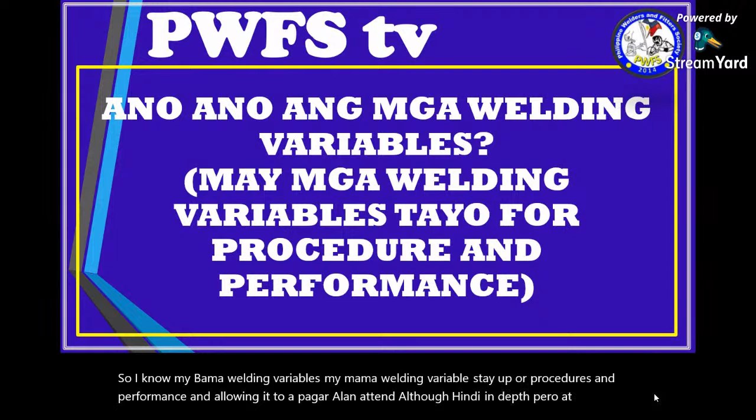So ano nga ba ang mga welding variables? May mga welding variables tayo for procedures and performance. Itong dalawang ito ay pag-aaralan natin. Although hindi in-depth, pero at least makikita nyo ano yung mga welding variables na ginagamit natin sa WPS natin, or sa ating welding procedure specification, at ganun din sa ating welder performance qualification test o WPQT. Right, so WPS welding variables...

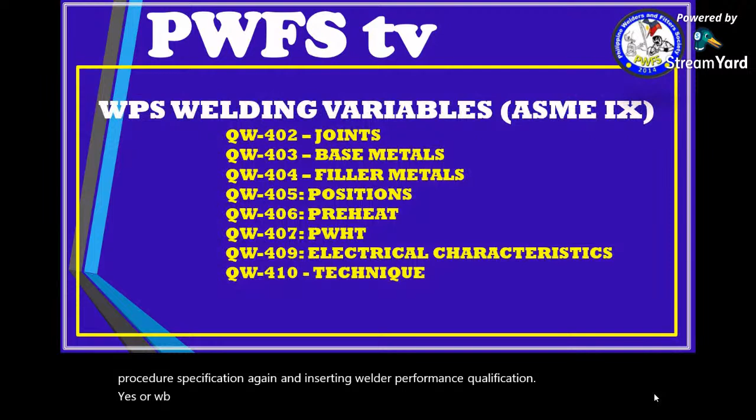WPS welding variables can be seen in ASME 9 as per QW 402, 403, 404, 405, 406, 407, 409, and 410. So these are the QW or the section of ASME 9, okay, where you can find the joints, base metals, filler metals, positions, preheat, PWHT, electrical characteristic, technique. So these are the specific WPS welding variables in accordance to ASME 9.

While the WPQT welding variables naman as per ASME 9 can be seen in QW402, which is the joints, QW403, which is the base metals, QW404, filler metals, and QW405, positions.

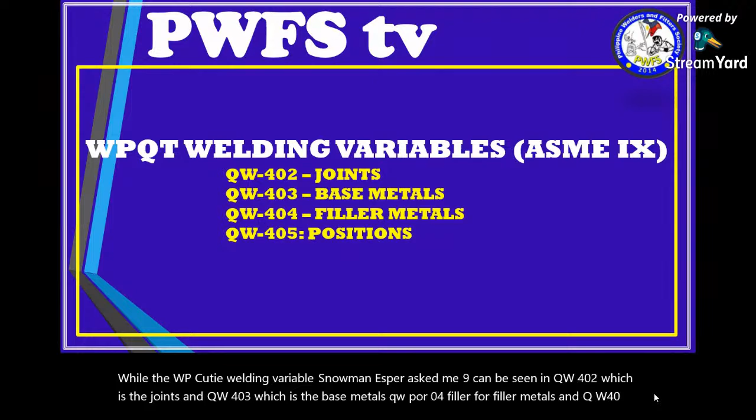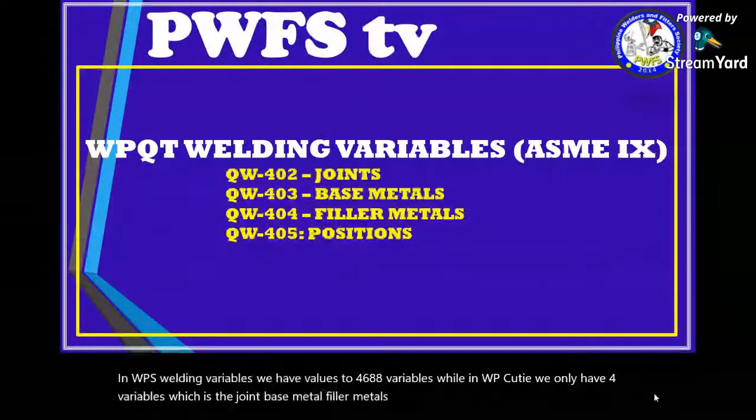So as you can see, in WPS welding variables, we have various variables, while in WPQT, we only have 4 variables, which is the joint, base metal, filler metals, and position. The rest are not variables in WPQT.

On the WPS, as per ASME 9, QW251.1, these are subdivided into three variables. Okay, so first one is the essential variable, the second one is the supplementary essential variables, and third one is the non-essential variables.

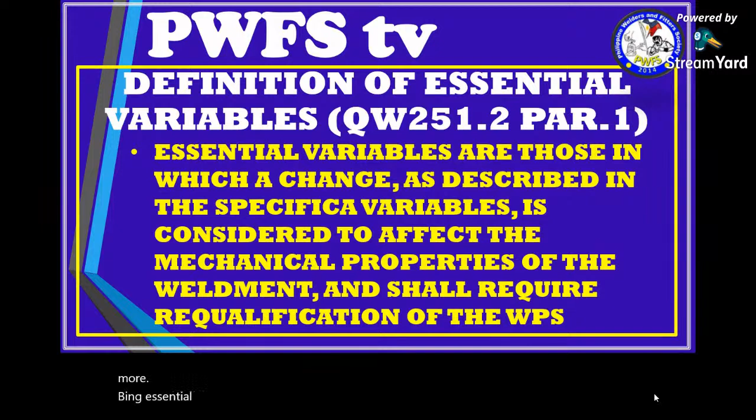Yung supplementary essential variable naman, as per QW251.2, paragraph 2, supplementary essential variables are required for metals for which other sections specify toughness tests and are in addition to the essential variables for each welding process.

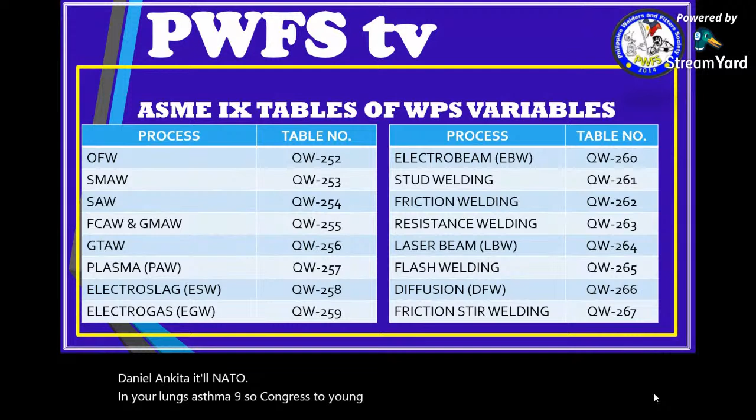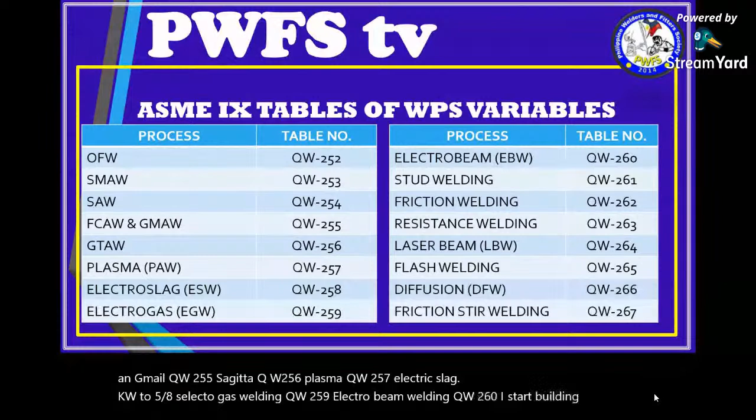Dito nyo sila makikita. So sa OFW, QW252, sa SMAW, QW253, sa submerged arc welding, QW254, sa FCAW and GMAW, QW255, sa GTAW, QW256, sa plasma, QW257, sa electroslag, QW258, sa electrogas welding, QW259, electron beam welding, QW260, stud welding, QW261, friction welding sa QW262, resistance welding, QW263, laser beam, QW264, flash welding, QW265, diffusion welding, QW266, and friction stir welding, QW267.

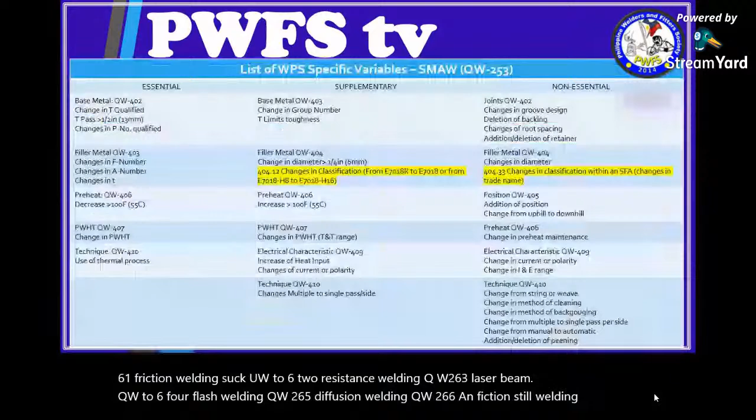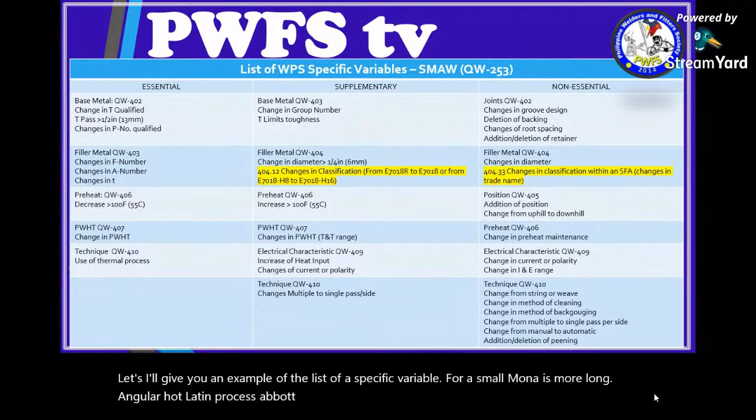Now, I'll give you an example of the list of specific variables for SMAW muna. SMAW lang, okay? Kasi kung tatalakayin ko lahat ng process, abutin tayo ng siyam-siyam. I'll just give you one example on SMAW or shielded metal arc welding. Okay? As per QW253, ang mga essential variables ng SMAW ay base metal, filler metal, preheat, PWHT, at saka technique.

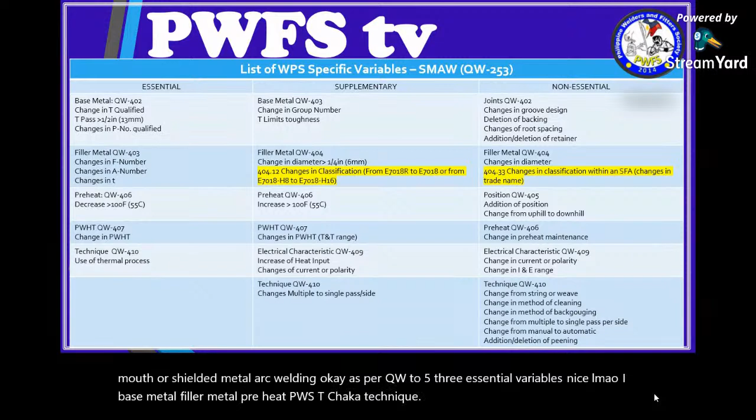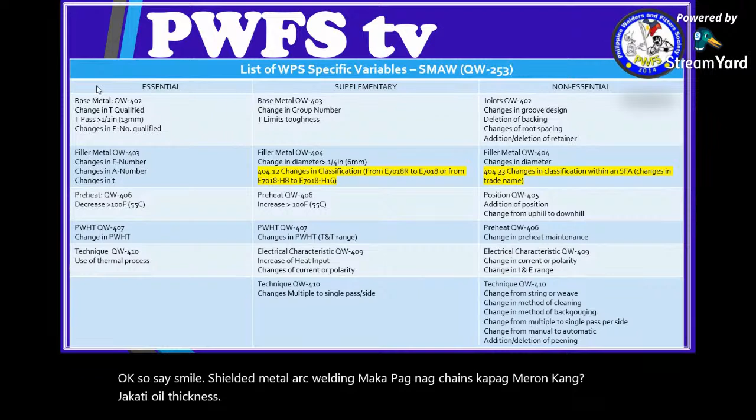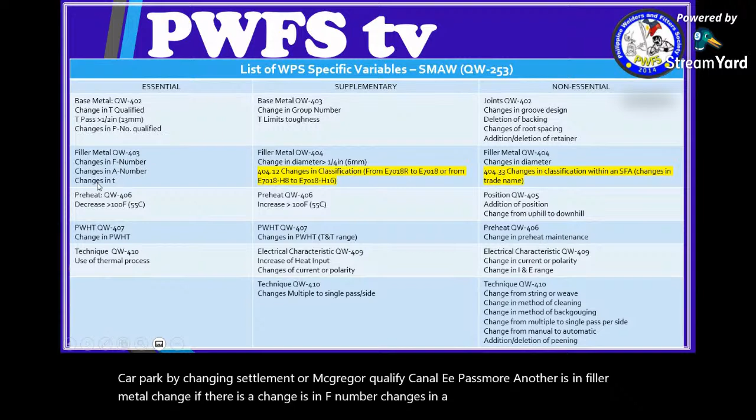Okay? So sa SMAW, sa shielded metal arc welding mo, kapag meron kang change in T qualified, tsaka T o yung thickness na greater than 13 mm, changes in P number qualified. Kapag may changes itong mga ito, magre-requalify ka ng WPS mo. Another is in filler metal. If there is a change in F number, change in A number, and change in thickness, your WPS must be requalified.

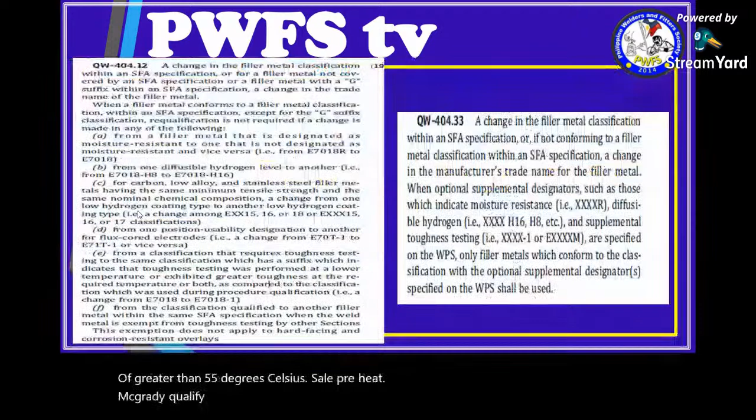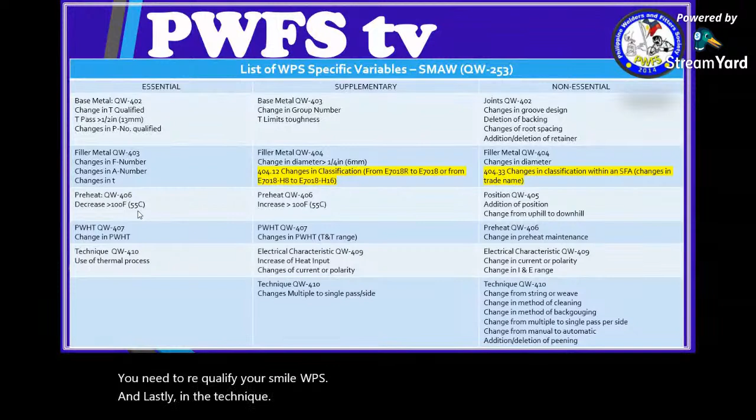Ganon din sa preheat. Kapag meron kang decrease of greater than 55 degrees Celsius sa preheat, okay, magre-requalify ka rin ng WPS mo. Ganon din sa PWHT. If there is a change in the PWHT, you need to requalify your SMAW WPS. And lastly, in the technique, on the use of thermal process, okay, magre-requalify ka rin ng SMAW WPS mo.

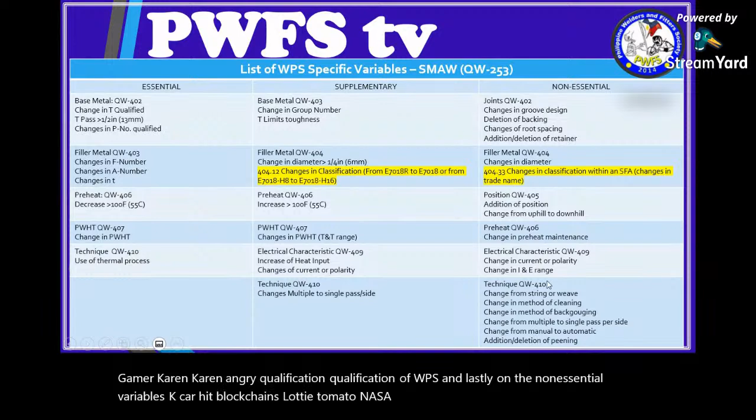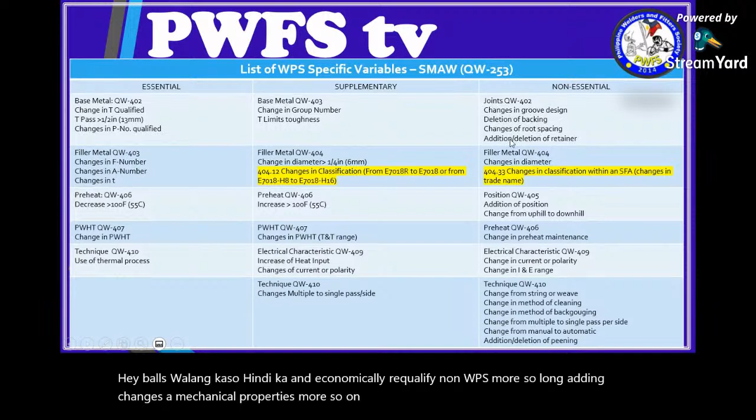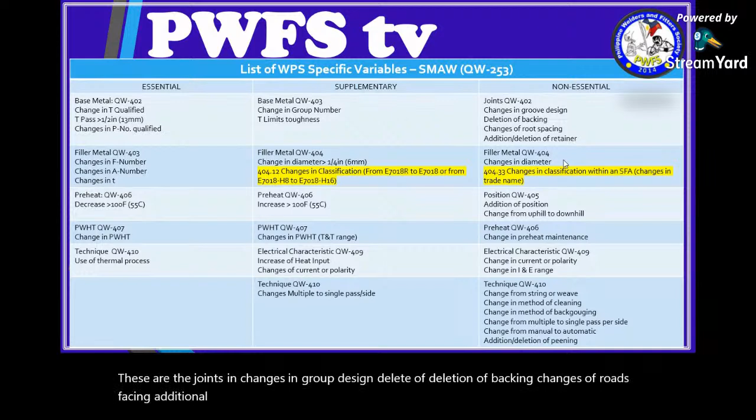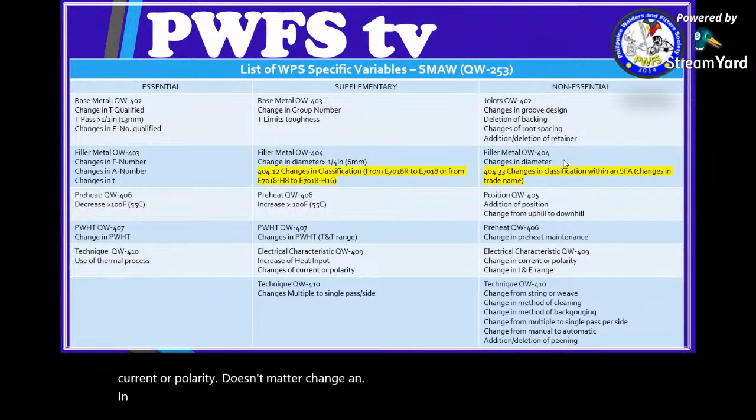These are the joints: changes in groove design, deletion of backing, changes of root spacing, addition or deletion of retainer. Okay? Sa filler metal naman, changes in diameter, changes in classification, it doesn't matter. Sa position, addition of position, change from uphill to downhill, it doesn't matter. Change in preheat maintenance, it doesn't matter. Change in current or polarity, it doesn't matter. Change in, tawag dito, range, okay?

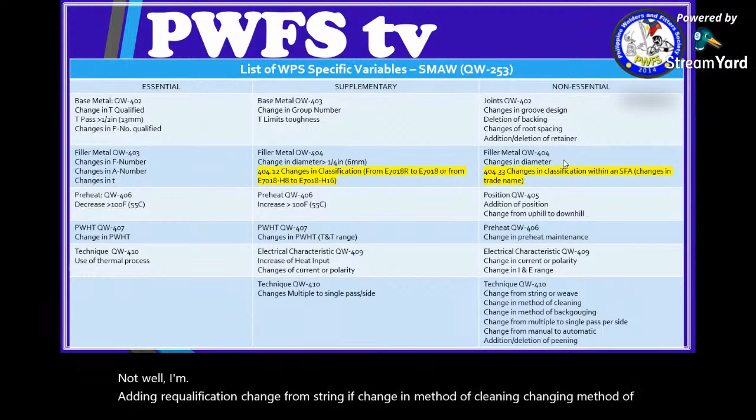Walang mangyayaring requalification: change from string to weave, change in method of cleaning, change in method of backgouging, change from multiple to single pass per side, change from manual to automatic, addition or deletion of peening, walang problema. Non-essential variables ito mga ito, so hindi ka na magre-requalify ng WPS mo as per ASME IX.

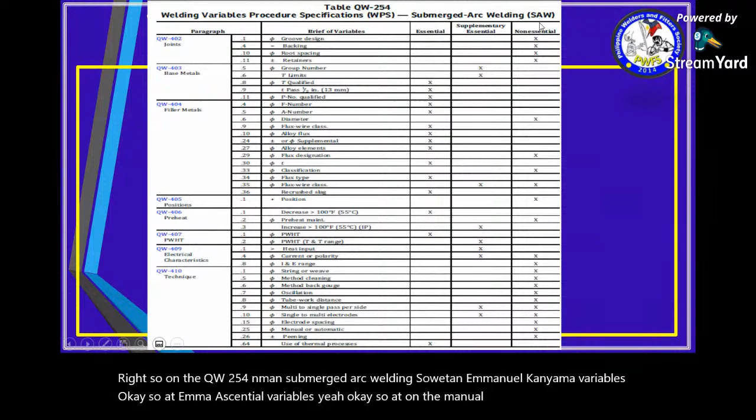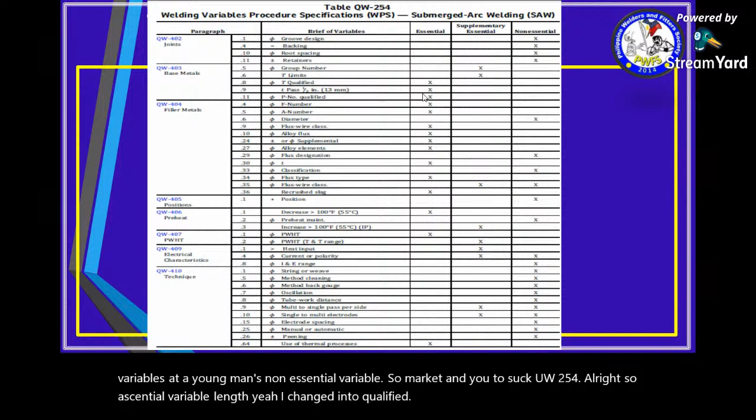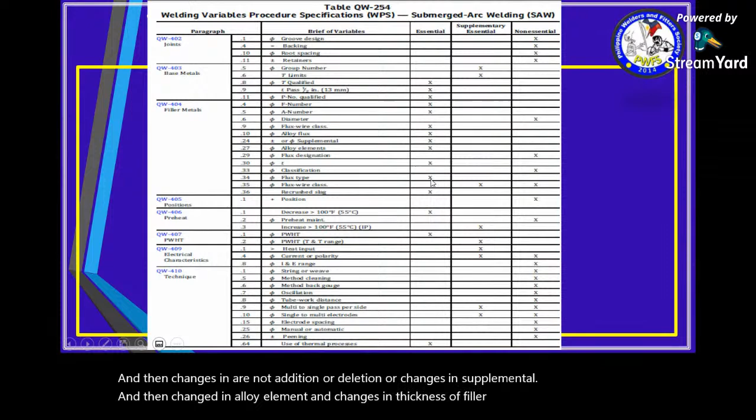Alright? So, ang mga essential variables lang niya ay change in T qualified, T pass greater than 13 millimeters, change in P number qualified, and then change in F number, change in A number, and then change in flux class, and then addition or deletion or change in supplemental, and then change in alloy element, okay, and change in thickness of filler metal, change in flux type, change in recrushed slag.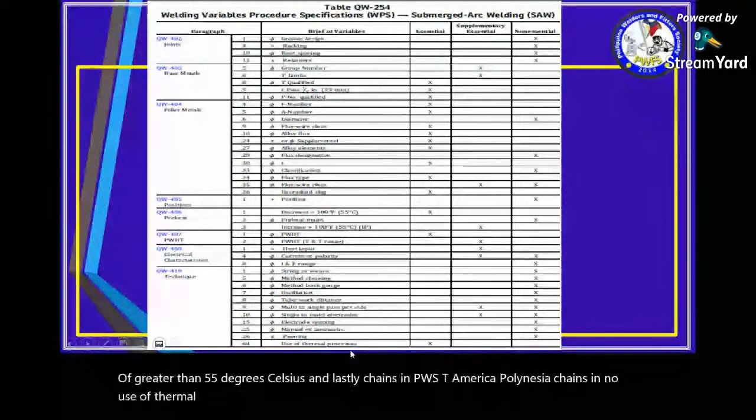And another two: in the preheat, decrease of greater than 55 degrees Celsius. And lastly, change in PWHT. Meron pa palang isa, change in use of thermal processes. So those are the essential variables. At ito naman yung mga non-essential variables. Alright?

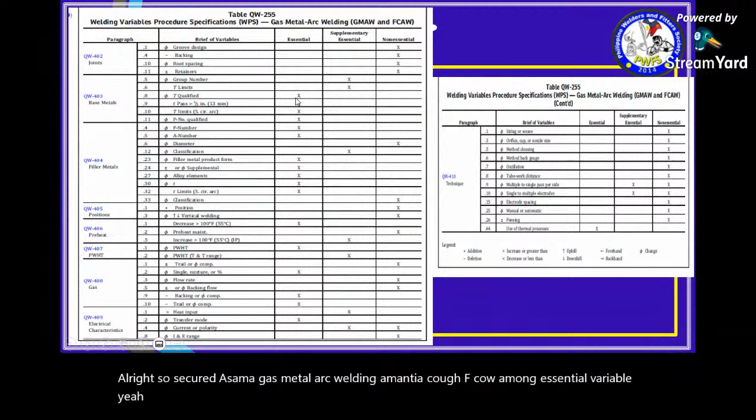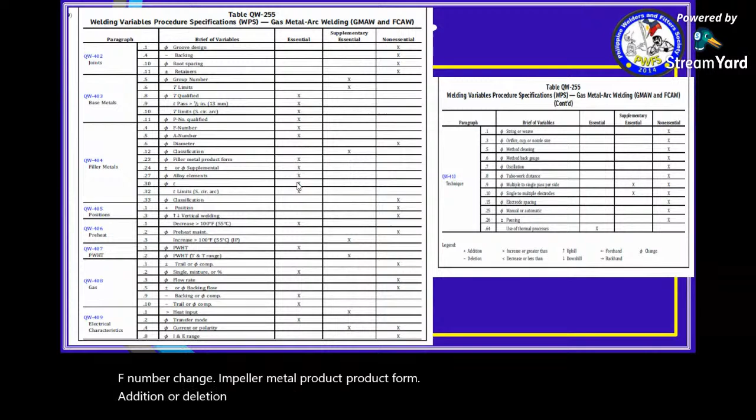So sa gas metal arc welding naman, tsaka FCAW, ang mga essential variable niya ay change in T qualified, change in base metal thickness greater than 13 millimeter, T limits, okay, thickness limit, and change in P number qualified, change in A number, change in F number, change in filler metal product form, addition or deletion or change of supplemental, change of alloying element, change of thickness of filler metal, and thickness limit.

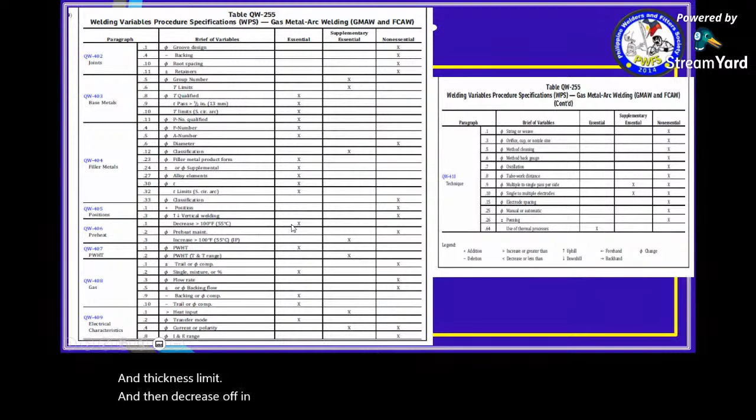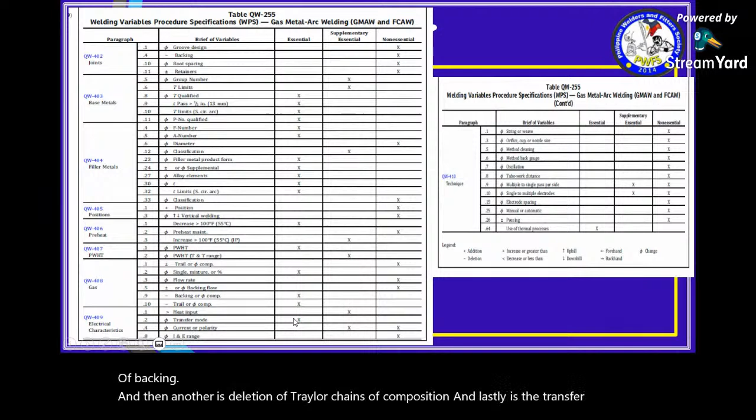And then decrease in the preheat, decrease of 55 degrees. And then change in PWHT, and then change in single or mixture of gas, and then the deletion of backing or change in composition of backing, and then another is the deletion of trail or change of composition, and lastly is the change in transfer mode. Okay, so yun yung mga essential variable naman ng GMAW at saka FCAW.

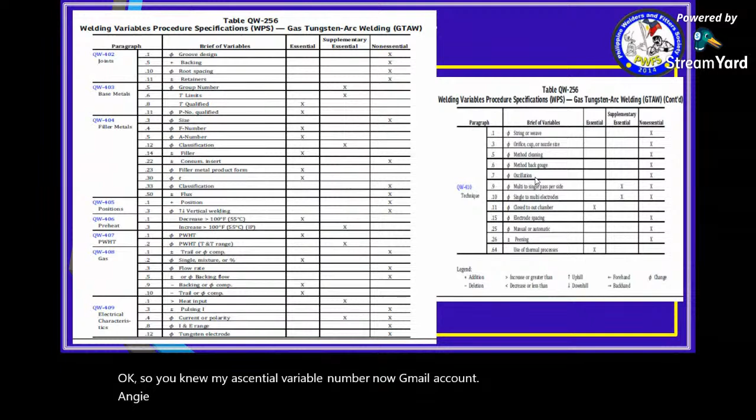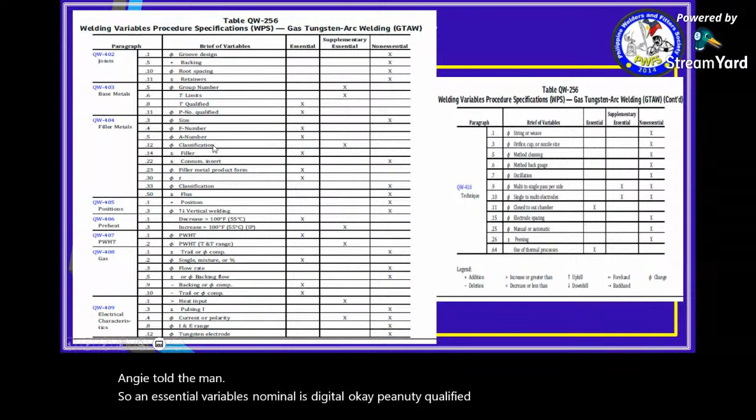Okay, ang GTAW naman, okay. So ang essential variables naman ng GTAW: T qualified, P number, F number, A number, filler addition, deletion of filler, and then change in filler metal product form, change in thickness of filler metal.

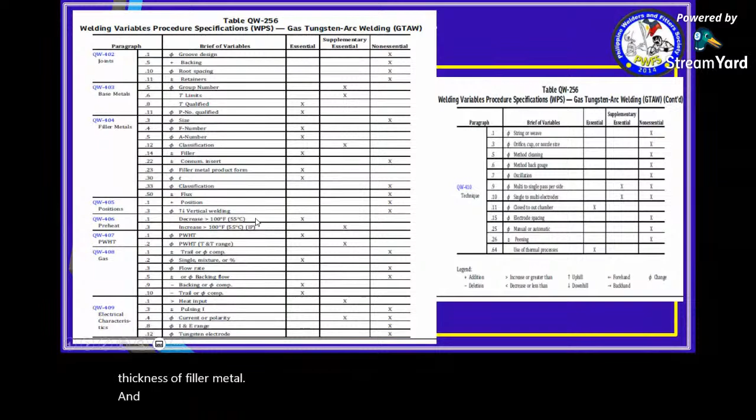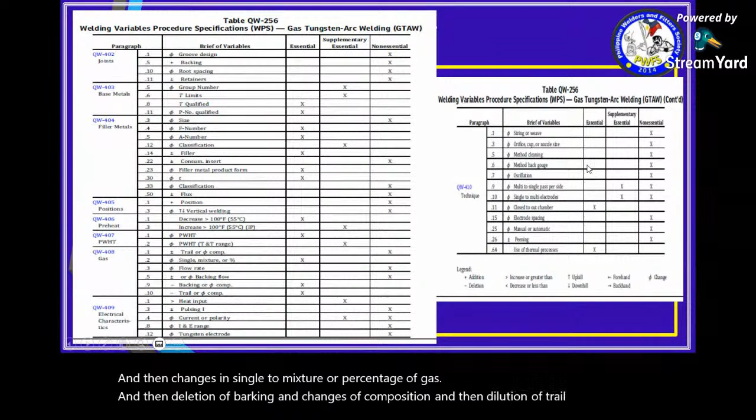And then decrease in your preheat, decrease of 55 degrees Celsius, changes in PWHT, and then changes in single to mixture or percentage of gas, and then deletion of backing and changes of composition, and then deletion of trail and changes of composition. Sa technique, change to closed to out chamber, and the use of thermal process. So, yun yung mga essential variable ng GTAW. So I have given you only GTAW, FCAW, GMAW, sub-arc, tsaka SMAW.

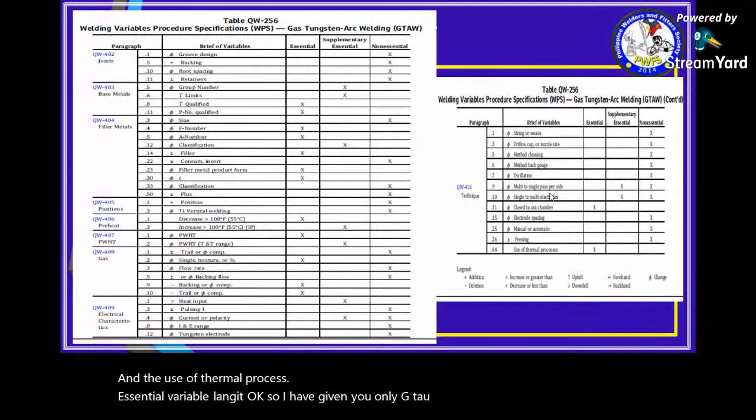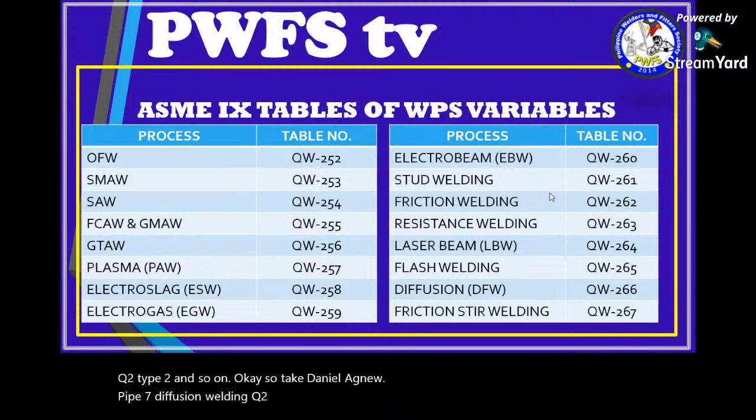So the rest you can just read in ASME IX as I stated in these sections. Okay, so dito makikita nyo OFW, QW-252, and so on. Tignan nyo lang yung mga yan. Halimbawa, kung ang gamit nyo is plasma, punta lang kayo sa QW-257. Kung diffusion welding, QW-266. Kung friction stir welding, 267, and so on.

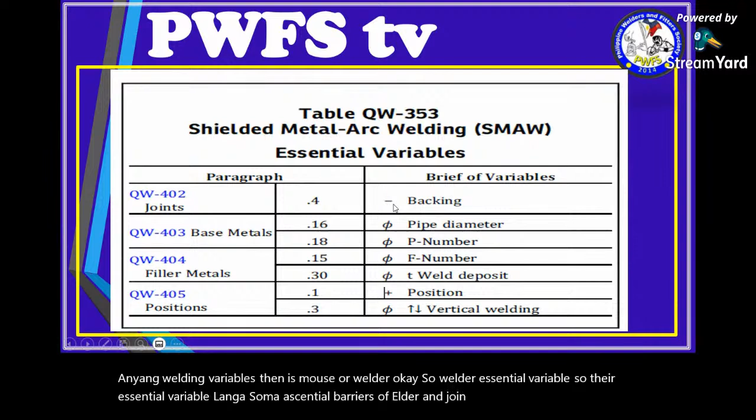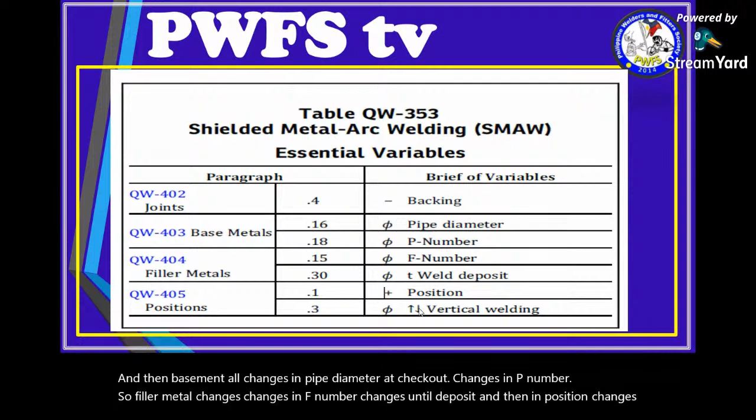Welding variables naman on welders. Ano naman yung mga welding variables ng welders? So ito naman yung welding variables ng SMAW sa welder essential variable. Ang joint: deletion of backing. Base metal: changes in pipe diameter, at saka changes in P number. Sa filler metal: changes in F number, changes in T weld deposit. And then in position, changes in vertical welding from uphill to downhill.

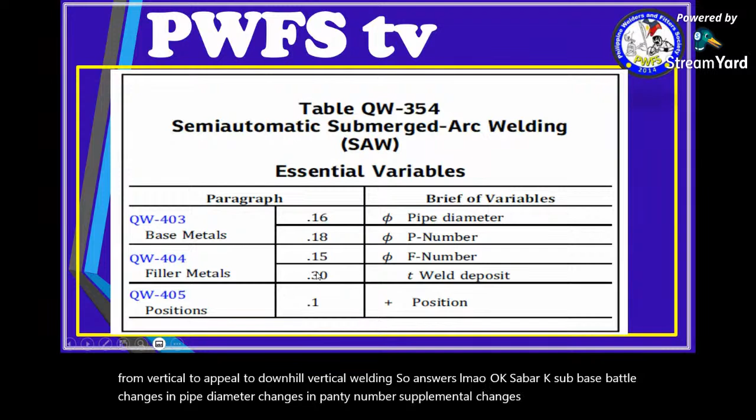So yan sa SMAW. Sa sub-arc, sa base metal, changes in pipe diameter, changes in P number. Sa filler metal, changes in F number, tapos changes in T weld deposit. Not changes, okay, thickness of weld deposit. And then in position, addition of position.

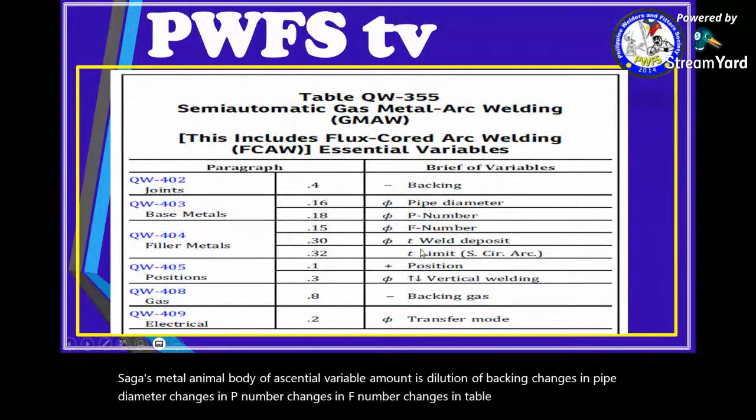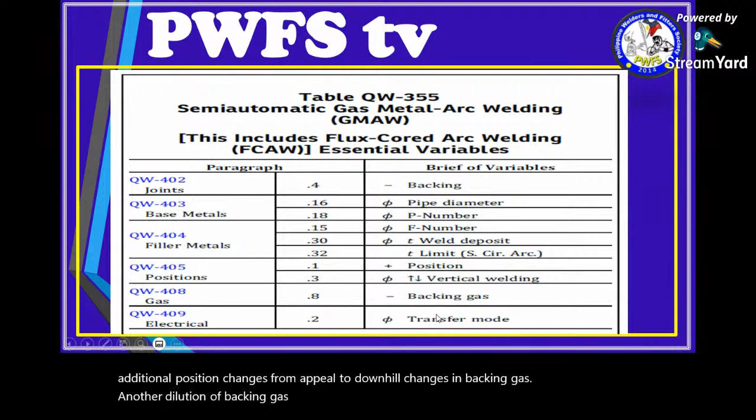Sa gas metal, ang mga essential variable naman is deletion of backing, changes in pipe diameter, changes in P number, changes in F number, changes in T weld deposit, weld deposit limit, addition of position, changes from uphill to downhill, changes in backing gas, deletion of backing gas, changes in transfer mode.

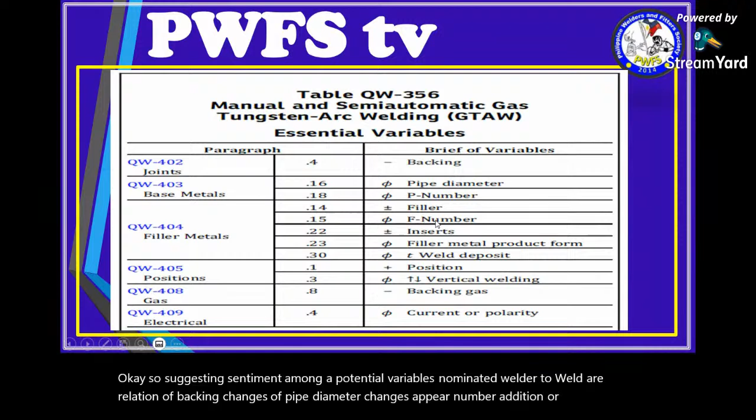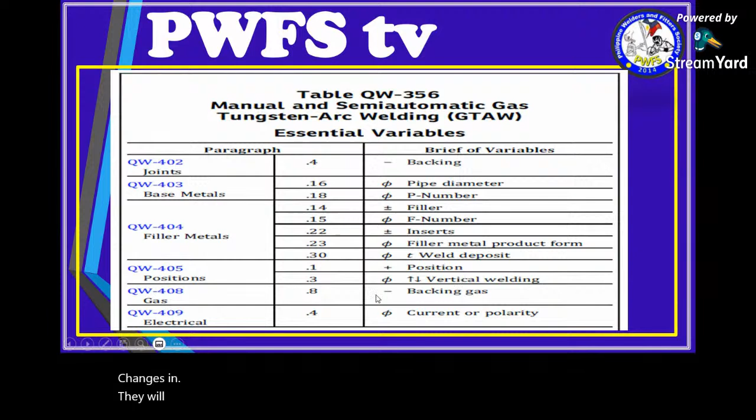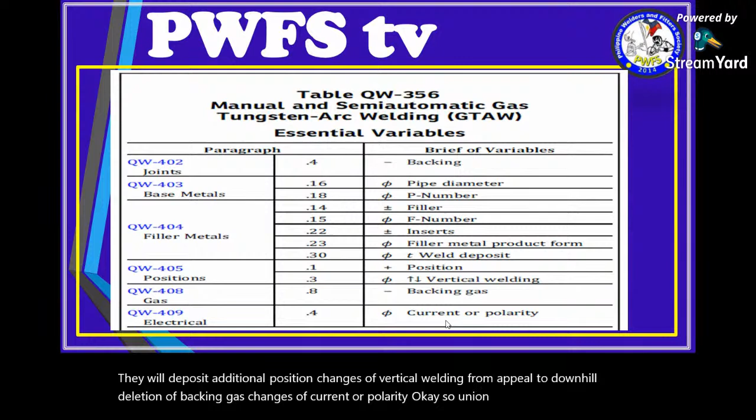So, sa gas tungsten naman, ang mga essential variables natin sa welder: deletion of backing, changes of pipe diameter, changes of P number, addition or deletion of filler, changes of F number, addition or deletion of insert, changes in filler metal product form, changes in T weld deposit, addition of position, changes of vertical welding from uphill to downhill, deletion of backing gas, changes of current or polarity. So, yun yung mga variables natin sa WPS at saka sa welder.

Okay? So, I hope may natutunan kayo.

Thank you very much. So, bigyan ko lang kayo ng quiz para magkaroon kayo ng certificate. I have 3 quiz. Give 3 WPS essential variables for SMAW. Tapos, pangalawa, give 3 welder essential variables for GTAW. Ipopost ko lang ito ng mga 5 minutes. Basahin nyo lang and then reviewin nyo yung video.